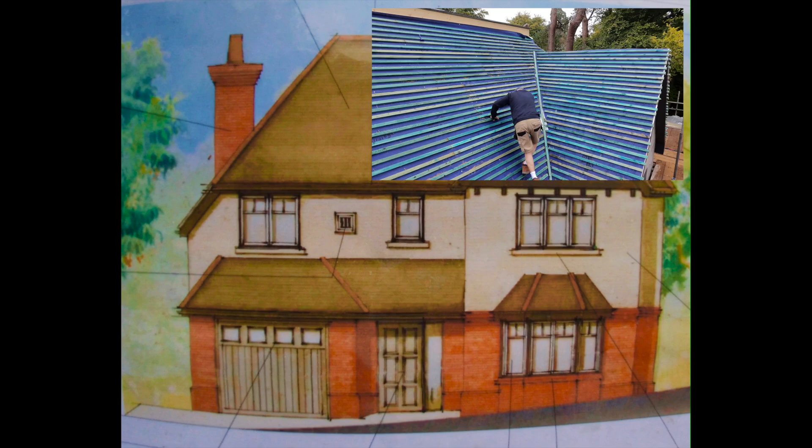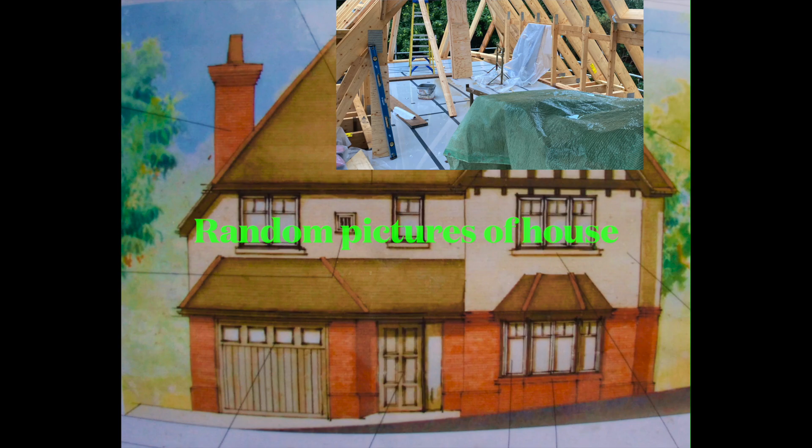Hello, this is the first video of a series of videos that I am hoping to make covering the installation of the heating and plumbing systems of a brand new house from the first fix to the finals. All of the central heating and hot water requirements will be produced by a 14 kilowatt Daikin monoblock air source heat pump. The hot and cold water systems will be fully pressure equalised, and the hot water will be stored and supplied via a Daikin 300 litre unvented hot water cylinder.

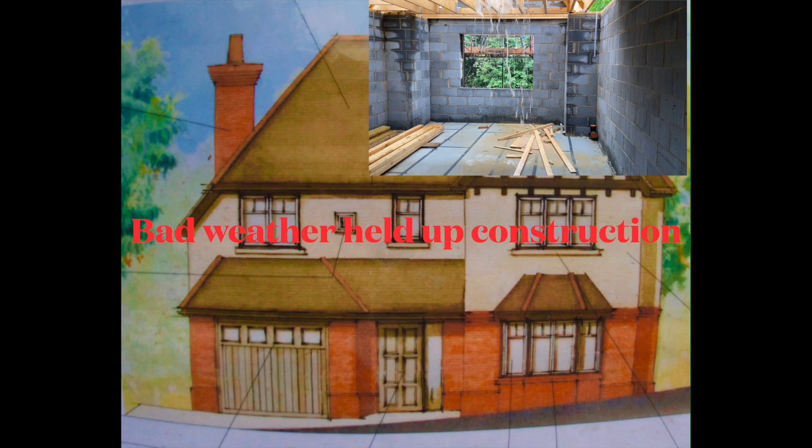The ground floor of the house will be heated via underfloor heating. The two remaining floors will be heated via normal radiators. All of the bathrooms will be heated via towel rails. These videos will also cover the installation of a water softener, a boiling water tap, and everything and anything and probably more involved in a full plumbing and heating installation on a brand new house.

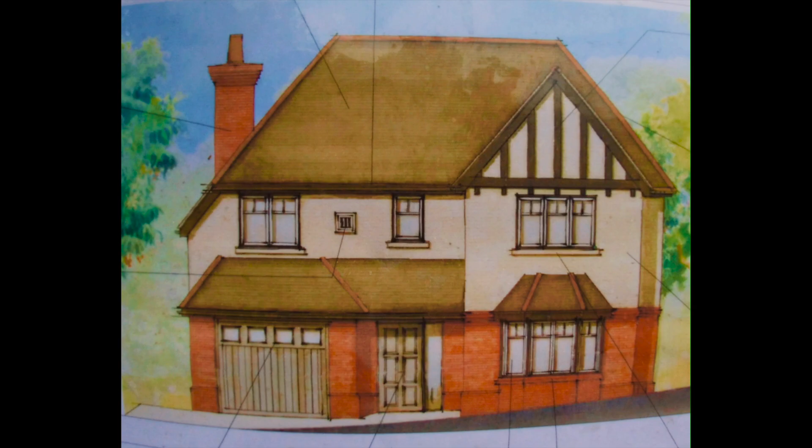In this video I'm showing the installation of one of the internal soil stacks. There are actually 4 soil stacks in this property serving 5 bathrooms. The purpose of a soil pipe is to convey sewage and wastewater reliably to the drainage system. The soil pipe takes all the wastewater from the baths, basins, sinks and WCs. The soil pipe can either be installed internally inside the building or fitted externally.

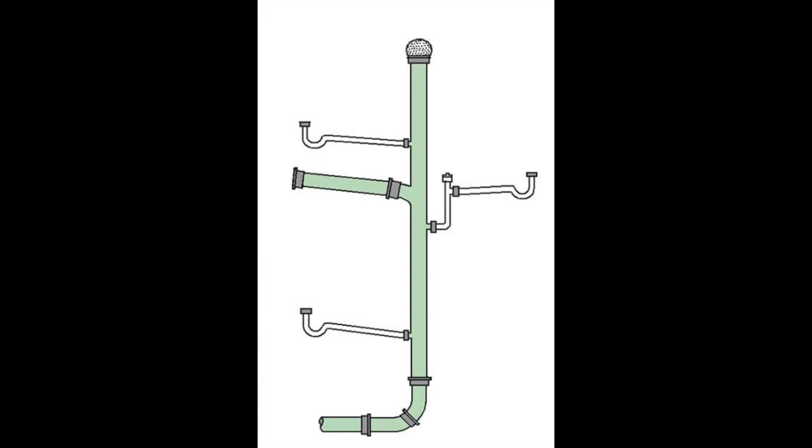The waste pipe diameters from the various appliances can be 32mm, 40mm, 50mm and, in the case of a condensing boiler, 22mm in diameter. The waste pipe from every piece of sanitary ware should be independently connected to the soil pipe. It's not recommended that waste pipes should be teed in together. In this video I'll only be showing the installation of one soil stack, and this soil stack will be the one marked on the drawing at the front of the house.

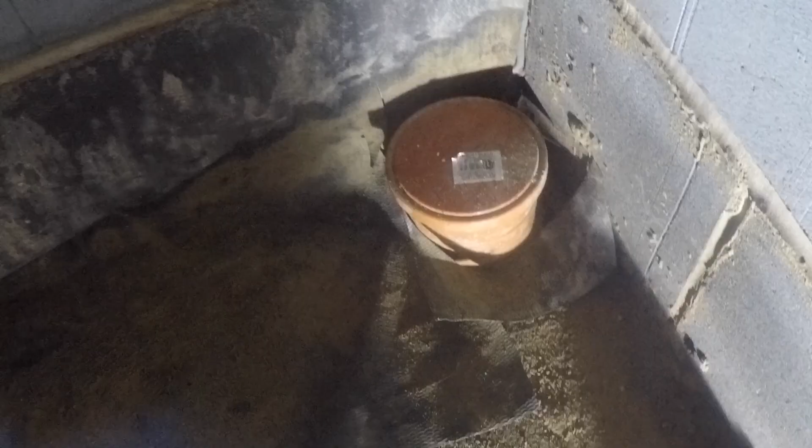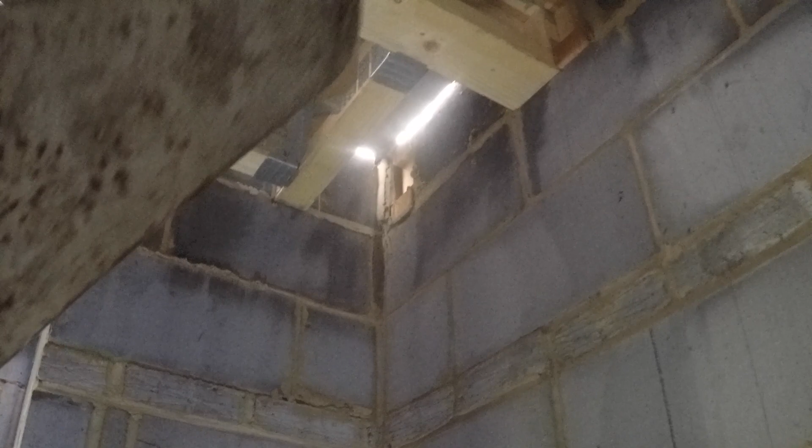It sounds obvious, but the first thing I do is check to make sure I've got the orientation of the bathroom correct and that I'm in the right part of the house. Then I locate the drain to make sure the builder has put it in the correct place. Here I'm just establishing the route the soil stack's going to take from the first floor, which is there where that trimmer is, down to the drain.

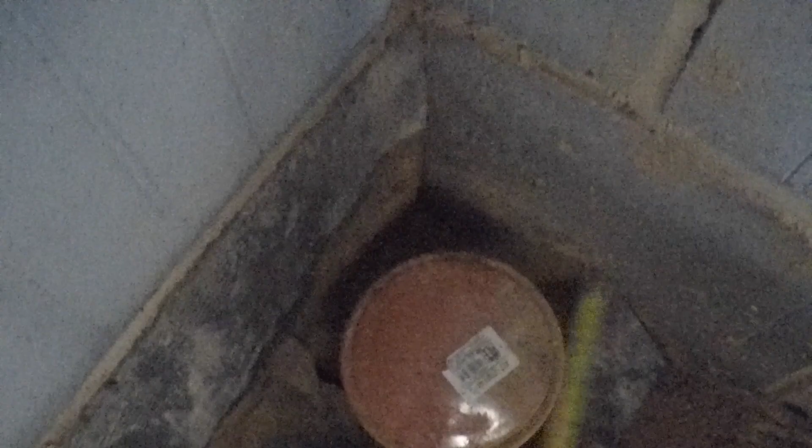And all I'm going to do now is just uncover it, clean it up. Once I've located it, I take a few measurements before I take off the cap and ensure that the drain is clear before I connect the soil pipe to it. Unfortunately, the position of the drain is not that clear here, but I can assure you it's just to the right hand side of that broom.

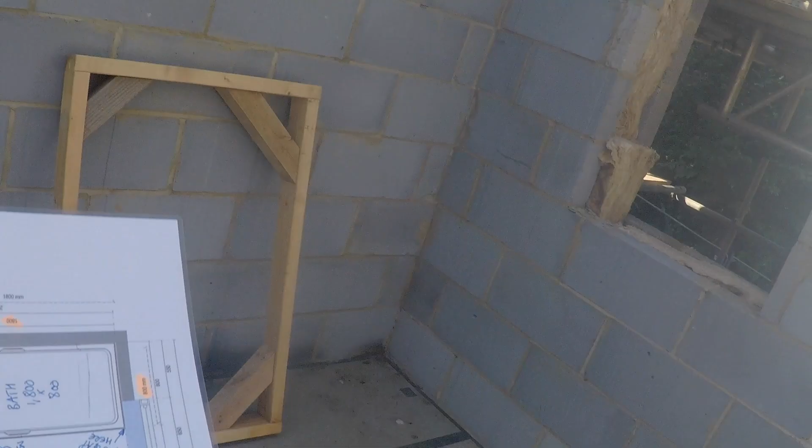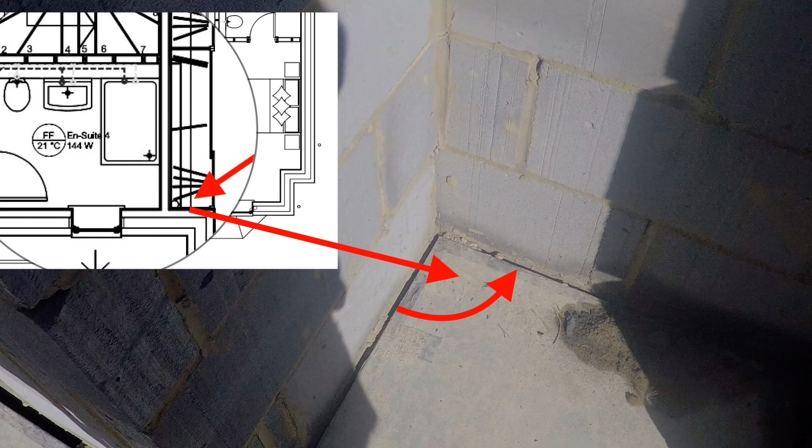I then go onto the first floor and just check out the bathroom position. As you can see from this diagram, this particular soil stack doesn't rise up in the bathroom itself. Once I've established where the soil stack is actually going to rise, I just mark on the floor where I've got to cut the hole to allow the stack to come up. And I always leave plenty of space.

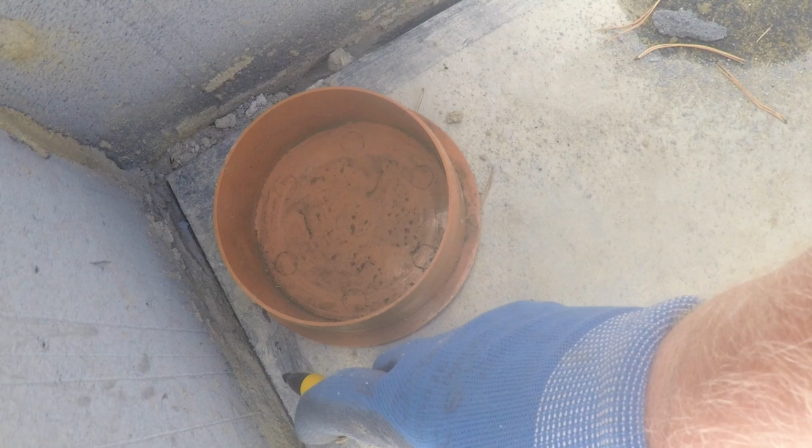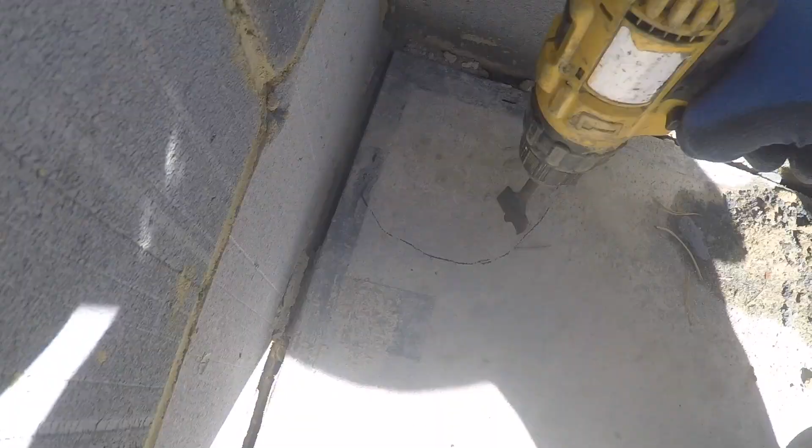The last thing you want is the plastic pipe rubbing on any timber of any description, because it becomes very noisy very quickly. So once I've marked the soil pipe position and I'm confident it's in the right place, there's nothing really fancy going on here. I just chain drill a few holes, bearing in mind that I've put the plug back in the pipe at the bottom to prevent any debris from going into the drainage system.

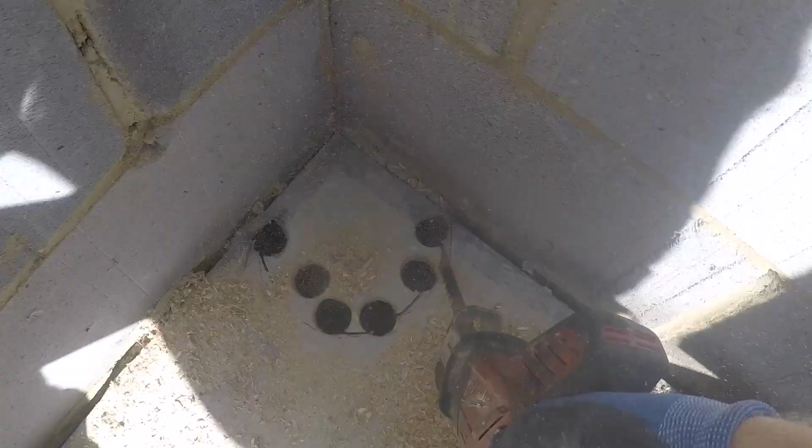Although this is a 3-storey house, this soil stack will terminate here on an air admittance valve. There's no requirement to vent every soil stack to the open air. The air admittance valve is basically a one-way valve which allows air to get into the soil stack but prevents it from escaping. Allowing the air to get in will break any siphonic action that might occur from solid plugs of water travelling down the pipe.

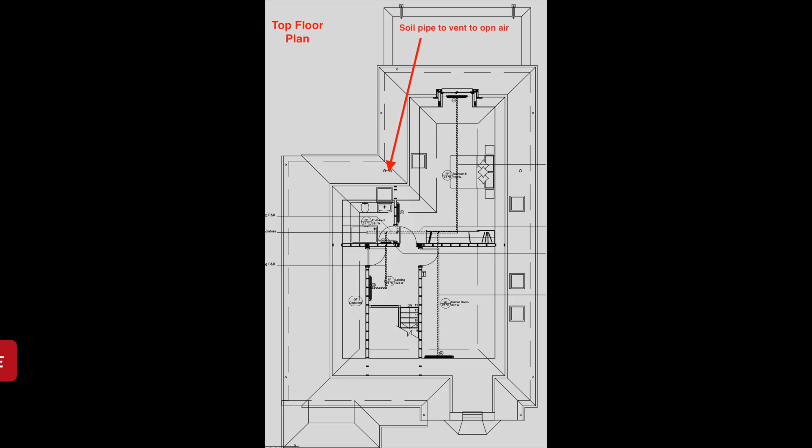And we all know that a solid plug of water travelling down a pipe can potentially suck water out of any traps. This will result in germs and bad smells entering the property. Here on the top floor plan you can see the soil stack that has got to be vented to the open air, and this is invariably the one that's at the top of the run. In this case it's the soil pipe at the back of the property, and all the drainage runs to the front of the property.

Here you can see I'm offering up a short boss pipe into the soil position so that I can mark the waste position for the bath. In this instance, they've switched the shower tray for a bath, which doesn't matter because both waste sizes are the same. Once I've marked the waste position, I drill the hole for the waste pipe itself.

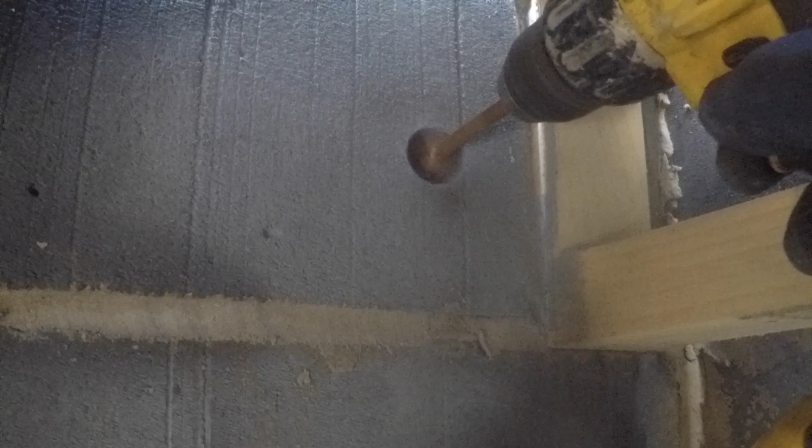And again, I'll chain drill a series of holes and make the hole bigger than I actually require it for the pipe, and pack some insulation around it. This is to prevent any noise and chafing of the pipe. Here you can see the hole. It's not that pretty, but it's large enough to accommodate the pipe with some insulation packed around it.

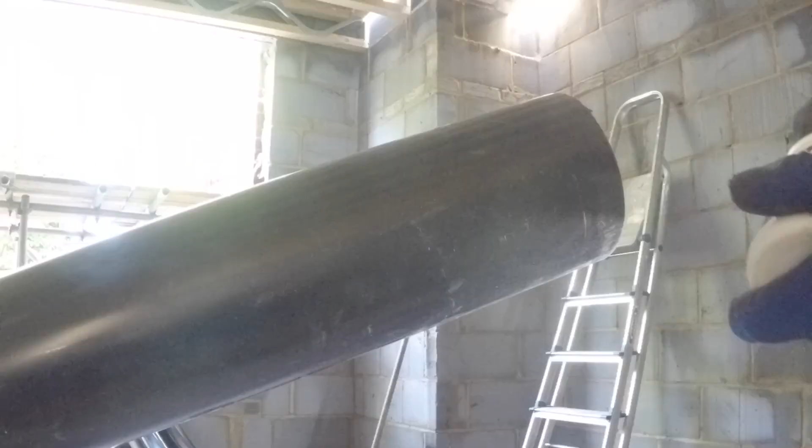When I'm happy with the position of the boss pipe, I cut the soil pipe to the correct length. Here I'm showing the hole from the other side. Once I've checked the measurement, I go about gluing the boss pipe onto the actual length of soil. When I'm fitting the boss pipe to the actual pipe itself, I always apply plenty of solvent cement both to the pipe and to the inside of the fitting, and I also give the fitting a twist as I put it on to ensure that I get good coverage of the solvent cement right round the joint.

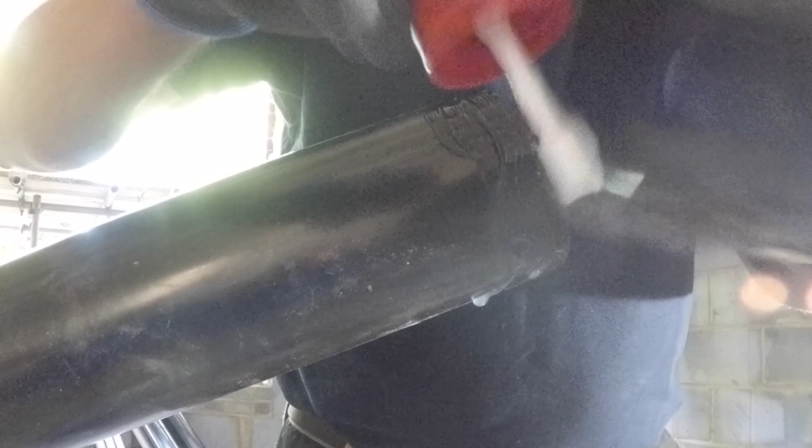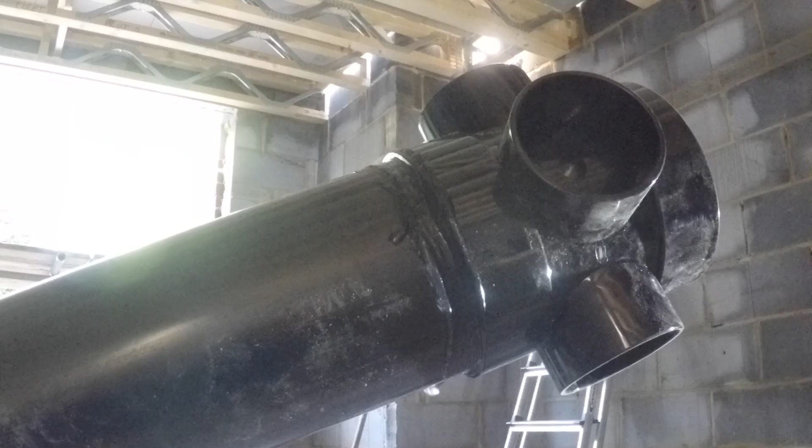When the boss pipe is glued on, I then take the boss insert, apply the solvent cement to that, and fit it in the correct outlet on the boss. You must always be careful to make sure you do, because it's easy to make the mistake of not fitting it in the correct one and it being blank when you come to put the water in it. Here you can see I've got an elbow in the boss insert, and that's in readiness for receiving the bath waste pipe. So that's in position.

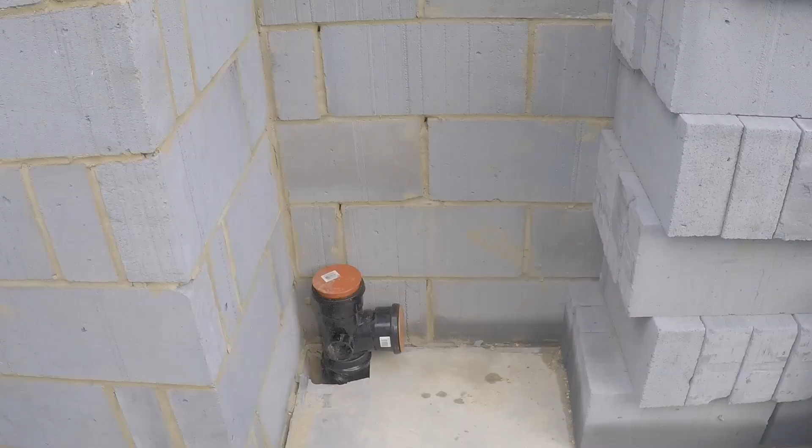I can work out the height of the branch, the outlet on the branch, and I cut the pipe to the correct length so that the branch is at the right height when it goes out through the floor. Here I'm just pointing out where the horizontal run of the soil pipe is going to be. It's going to be boxed in at the bottom of a wardrobe. That stack of blocks you can see will eventually be moved.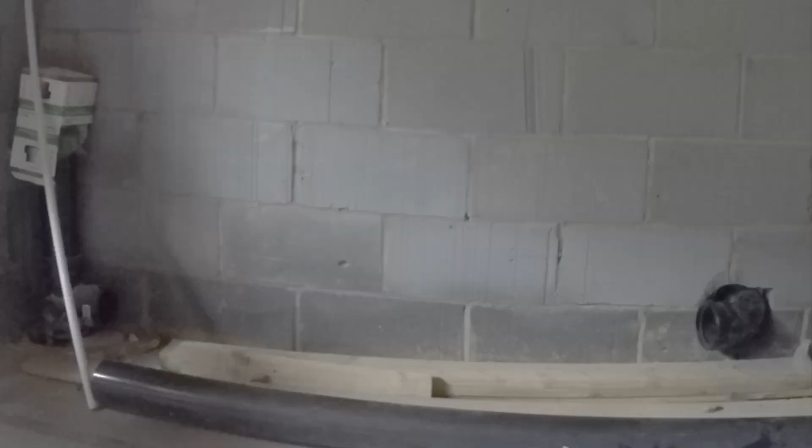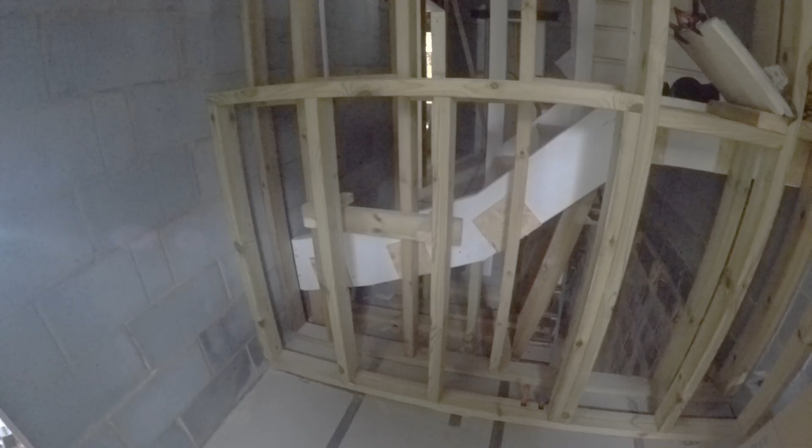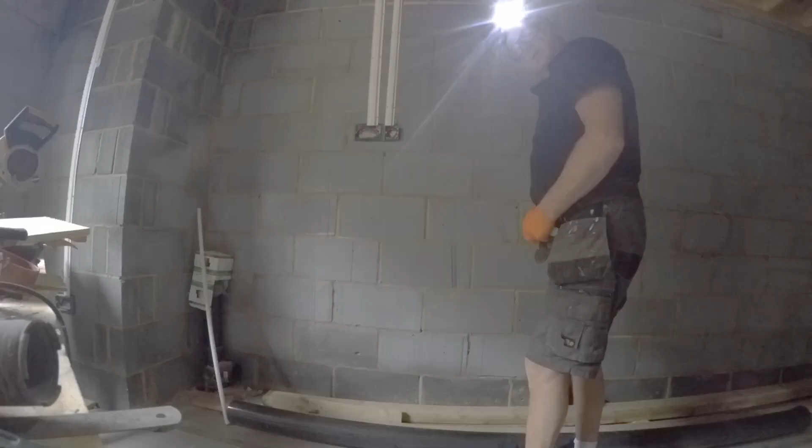I've got here the soil bend that's going into the bathroom roughly in the right place so that I can measure up, see what length of pipe I have to put between the branch and the soil bend itself. This is the inside of the bathroom, now the stud work's being formed. Here you can see I've got the soil bend in position. So now I'm going to measure between the two, establish what length of pipe I need, cut it, prepare it, and join the two together.

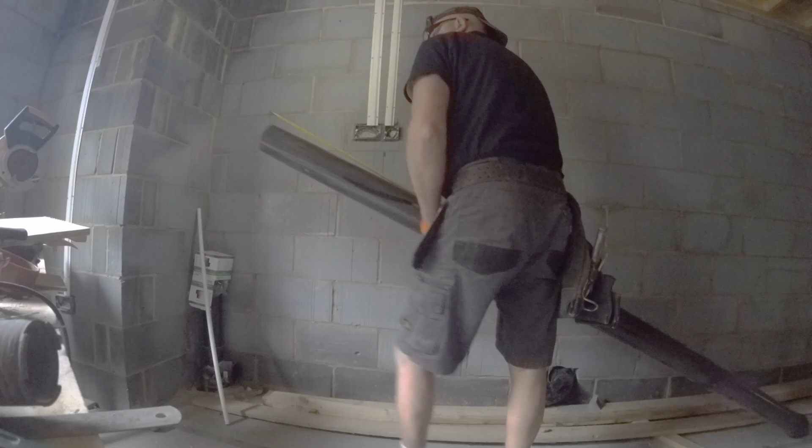You might notice here how dark it is. When I did the first part of the soils, the roof wasn't on, but now the roof's on, it's quite a dark house, and having to use artificial light all the time, so I apologise for the quality of some of the video.

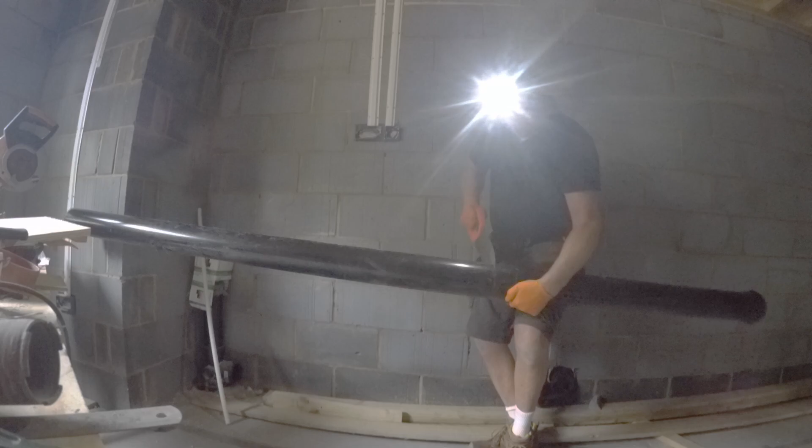So I measure up, cut the pipe to length, and chamfer off the ends so that they don't damage the rubbers when they go into the fittings. Lubricate them and just push them together. You can see there just in the top of the branch now I've got a short upstand which is above the flood level of the bathroom, and on top of there is the air admittance valve. I always protect them with the box and a bit of packaging to prevent other trade damage.

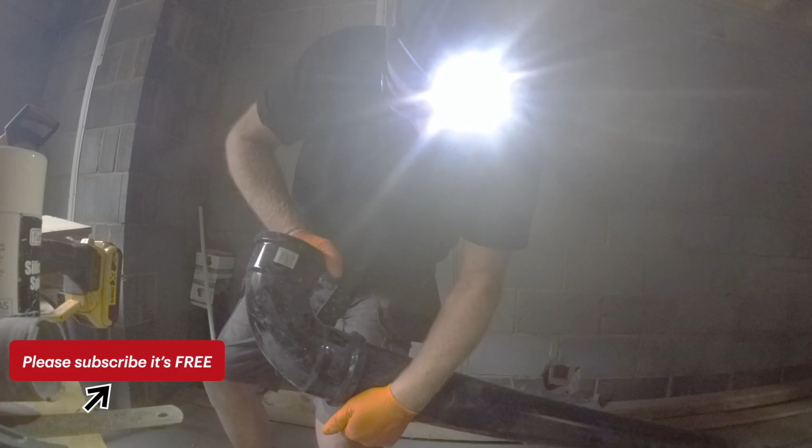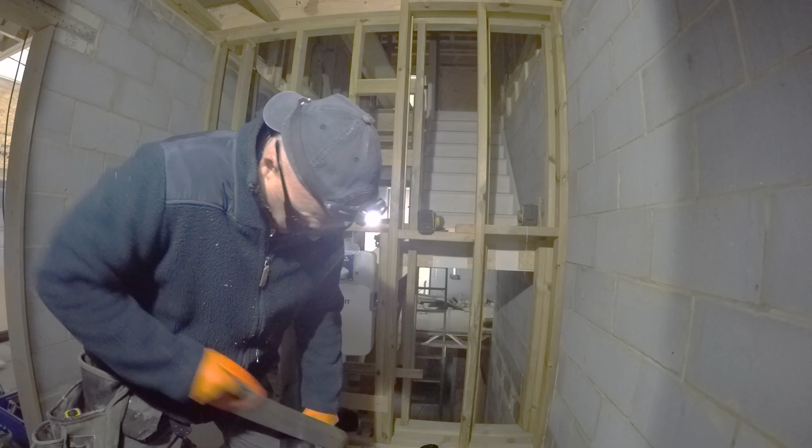Thank you. Now I know where the socket of the soil bend is, I can take a measurement for a short length of soil pipe so that I can attach the boss pipe that will take the basin waste in this bathroom. I fit the short boss pipe onto the end of the pipe in the usual way, using plenty of solvent cement and twisting the fitting on in the usual way. Plenty of solvent onto the boss insert, and once again push that in and twist it as I go. Makes a good joint.

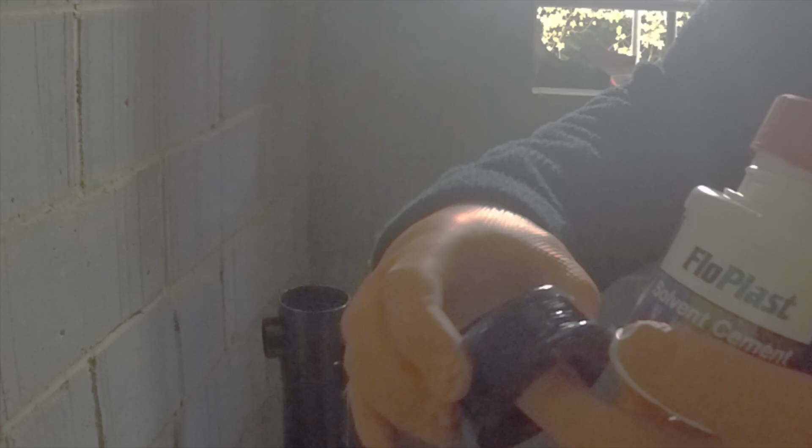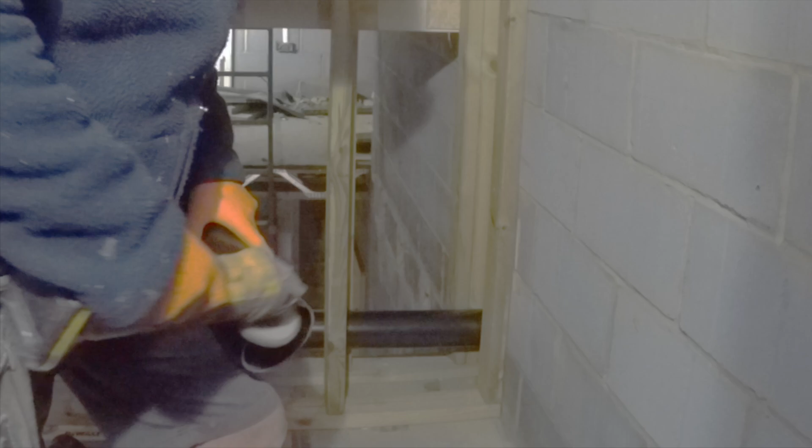So that's the first horizontal bit pushed safely into the socket of the soil bend, should I say. And now all I've got to do is put the second half in, which is the connection for the WC. You can see I've fitted the cistern already so I can get a centre to work from. It's just a case of now cutting the pipe, chamfering the end and fitting it all together. And that's basically it for the soil.

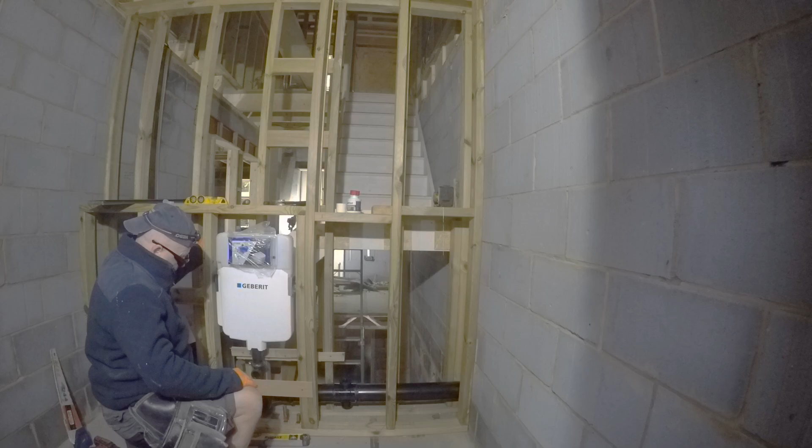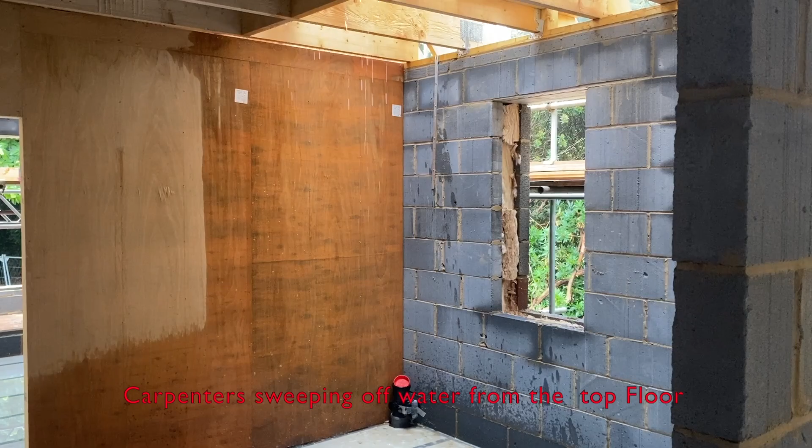I've got to put another clip on it obviously, but I don't think I'm going to be able to show that in this video because I'm a bit pushed for space. So that's it. The first part of the plumbing on any new build is the installation of the soil stacks. Next will be the central heating and plumbing pipe carcass work, weather permitting of course.